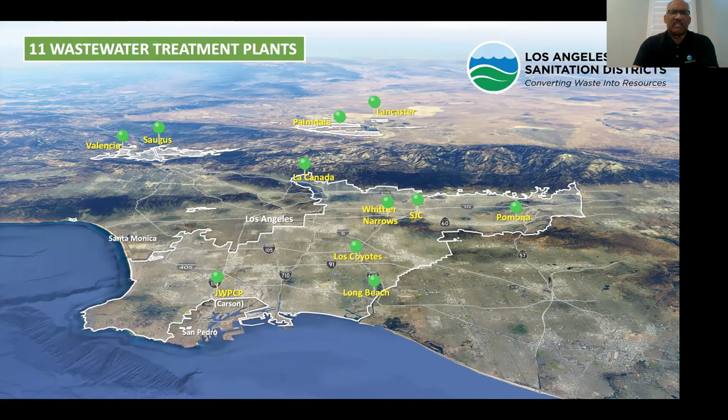Today, we're going to focus in on two of our sewage treatment plants in Santa Clarita Valley. On this map, you see the Valencia and Saugus treatment plants, and here's a close-up shot of that particular district. The dots here represent the Saugus and Valencia plants. The shaded area is the service area, the area that the sewage drains to these two treatment plants. The Saugus plant can treat about 6.5 million gallons per day, and the Valencia plant, that Mary's going to talk more about, could treat up to 21 million gallons per day.

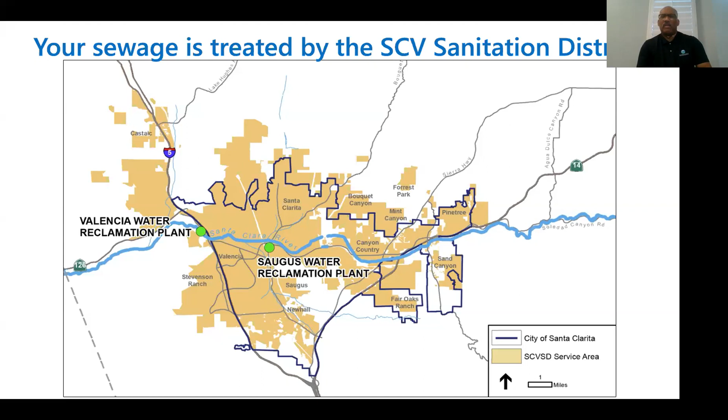Now, today we're going to focus on the Valencia plant. And with that, I think I'm going to turn it over to Mary. Mary, you're muted.

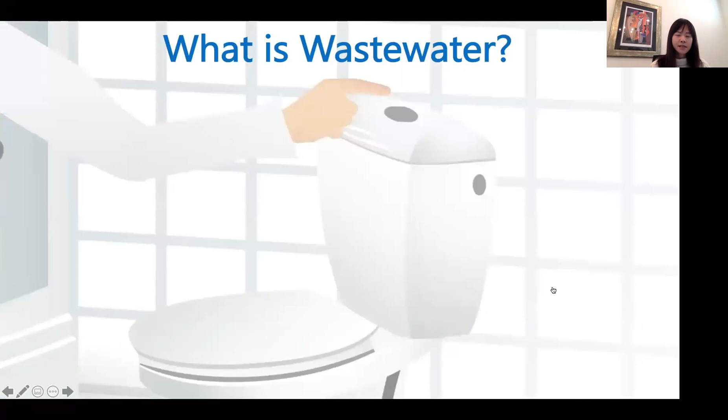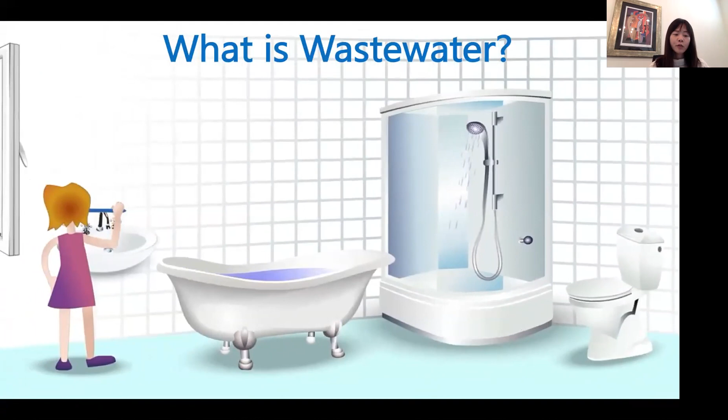Before we go into details of the treatment process, let's talk about what is wastewater. When you flush your toilet, take a shower, brush your teeth in the morning, or do laundry, they all require water. Each person creates about 85 gallons of wastewater a day, and the water you use goes down a drain to a pipe below your house, which we call a sewer.

The sewer system is quite amazing. It's a huge collection system underground that runs for miles. I'm sure most of you have seen manholes on the street, and underneath those manholes are actually sewer pipes. These sewers are built sloping down towards the treatment plant, so your wastewater arrives at the plant with the help of gravity. Gravity really is our friend for wastewater treatment because it's free - we don't have to use pumps or additional energy to move wastewater from your home to the treatment plant.

A wastewater treatment plant, I'm sure you already know, is a place where wastewater is treated to a very high level of quality and can be safely reused. As Basil mentioned earlier, reusing water is especially important in Southern California, where the weather is dry and we often experience water shortages.

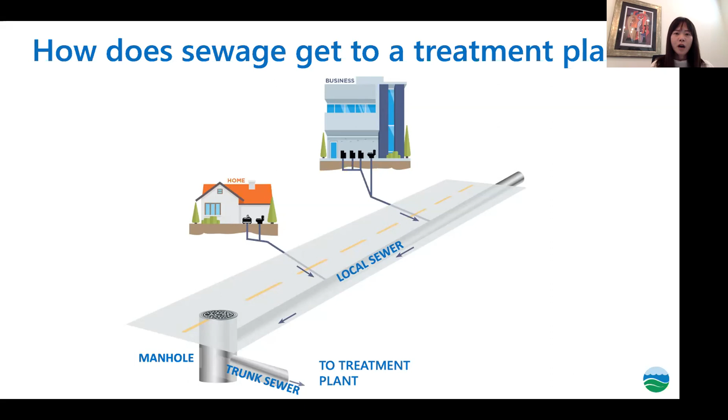The Valencia Water Reclamation Plant processes wastewater and all the solids generated in the sewer. This treatment plant was first constructed in 1967 with an initial capacity of 1.5 million gallons a day. Since then, we've had a couple of expansions, and now the treatment capacity is 21.6 million gallons. That's a little hard to grasp for some people, but imagine a gallon of milk that you see at the grocery store, and multiply that by 21.6 million gallons - that's how much the plant can process. So that's a lot of flow.

Most of the plant processes have been upgraded throughout the last 20 to 30 years to meet more stringent discharge requirements. Our upcoming projects include ultraviolet facilities and advanced water treatment facilities, which Basil will cover a little more in the later slides.

Typically, if we have tours on site, this is our starting point. But the difference with the virtual tour is that you don't get to have the delicious coffee and donuts that we usually provide for our attendees. So hopefully you have your own coffee while you're listening to this virtual tour.

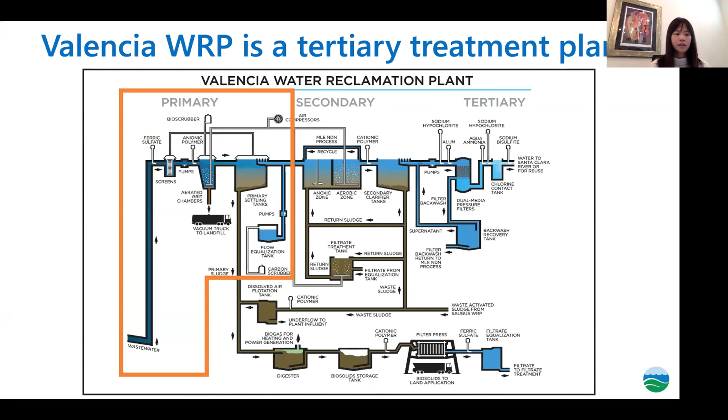The first major step is called primary treatment, where we remove large visible solids in the wastewater. The very first thing we do when wastewater enters our plant is use mechanical screening equipment to remove large objects like wipes, rags, and plastic bags.

One of the interesting things I've heard at one of our treatment plants is that operators sometimes see dollar bills or diamond rings in the bin. So if you ever accidentally lose your diamond ring, now you know where to look for it.

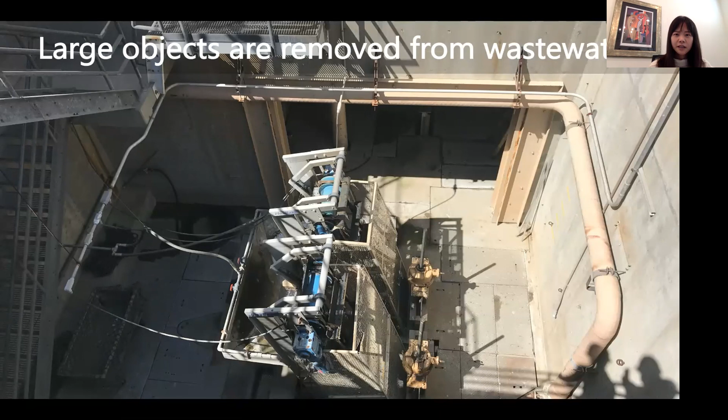Here's a close-up of our bar screen, and we call these flex rake bar screens. We have two bar screens working on our site.

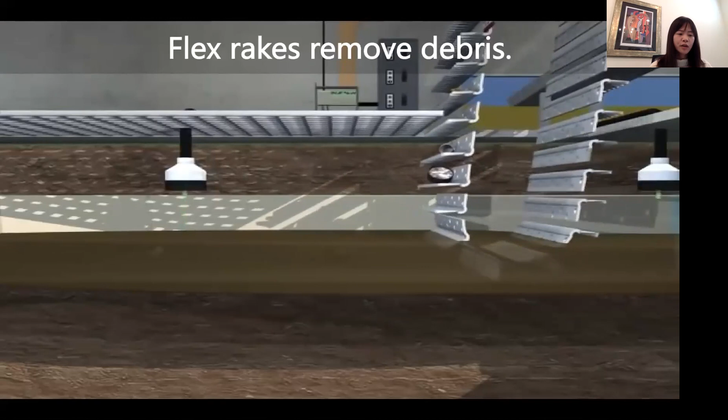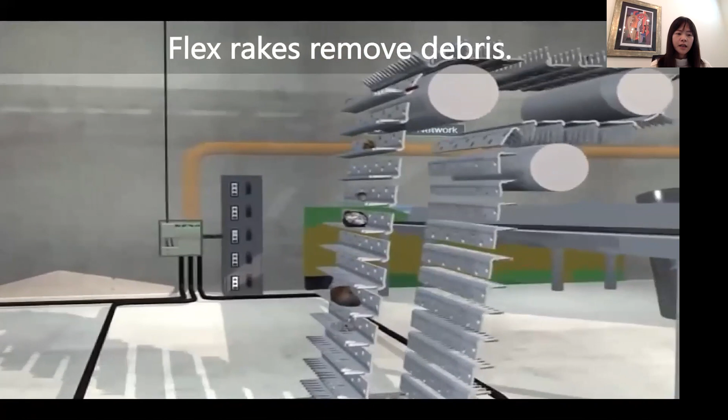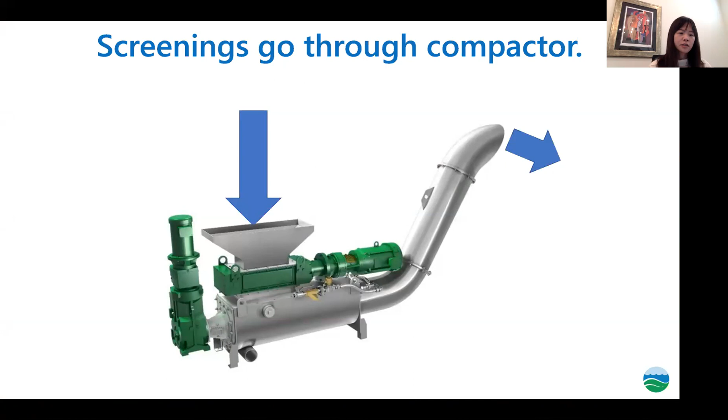Here's a good video that shows you how the screening equipment works. We have rakes that move vertically to catch debris and solids in the raw sewage, and we convey the solids upward. The solids then go into a grinder and a compactor before being dropped into a bin or trash bag nearby.

This video shows what comes out of the screening equipment. The debris that gets picked up by the bar screens is a little different from plant to plant, but what we've seen consistently throughout all of our WRPs is these flushable wipes.

The flushable wipes don't dissolve in water like toilet paper does, like the video that you just saw. So they do end up in our wastewater treatment plant, and it can actually do more serious damage to our pumping equipment, and those repairs can be quite costly for us.

As part of this tour, we really want to urge people to refrain from flushing those seemingly flushable wipes down the toilet. It may be convenient, but it actually creates a cost burden for your wastewater treatment plant.

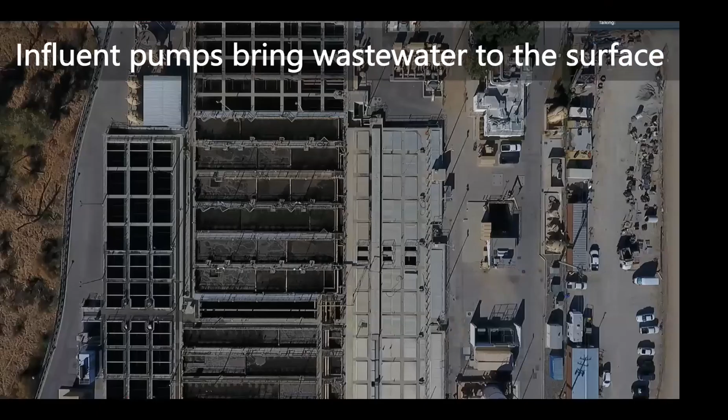After the screening equipment, wastewater enters our influent pump station, where wastewater is pumped from about 30 feet below grade to the surface. Here's a photo of 3 of our 6 influent pumps.

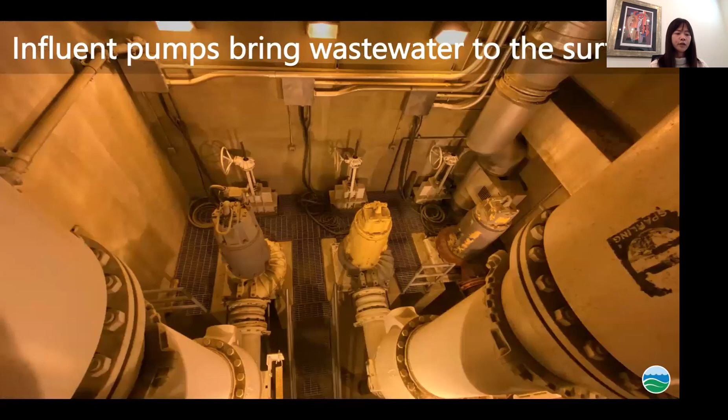One cool thing about these virtual tools is that we can actually show you photos of places that we typically don't take our tour groups to.

From the influent pump station, the wastewater is pumped into our grit chambers. Inside these grit chambers, we are removing grit, eggshells, sand, and smaller particles to protect our downstream pumping equipment, and we can prevent grit settling in our pipelines and channels. We have 4 grit chambers, and each of them is about 6 feet deep.

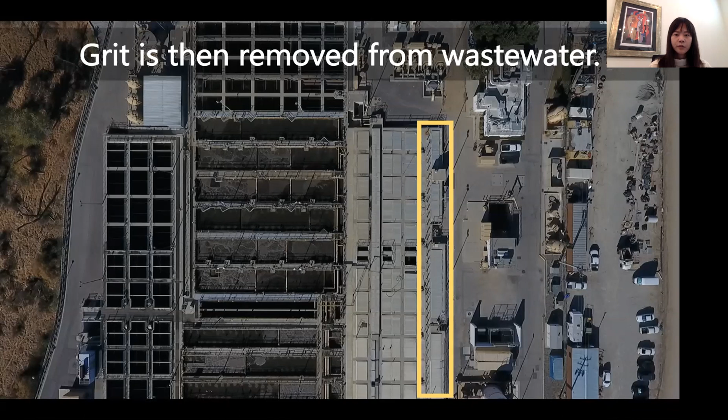From the grit chambers, wastewater flows by gravity into our primary sedimentation tanks. Here's a photo of our primary tanks. The main point of this process is to remove oil and grease that floats on top of the tank and remove more solids at the bottom. We do add chemicals such as polymer and ferric sulfate to enhance our settling.

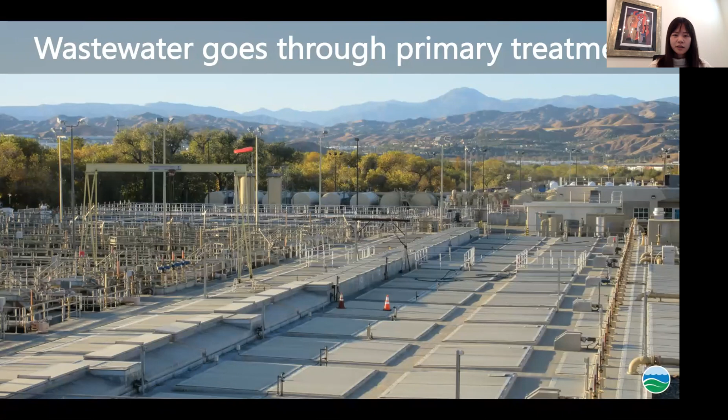As you can see, these tanks are typically covered because we want to be good neighbors, and we're actually really close to Magic Mountain, so we wouldn't want those riders to smell anything foul when they're screaming their lungs out up there. Let's take a closer look at the floatable materials when we open up one of the lids. You can see a little bit of grease and still a little bit of sand up there.

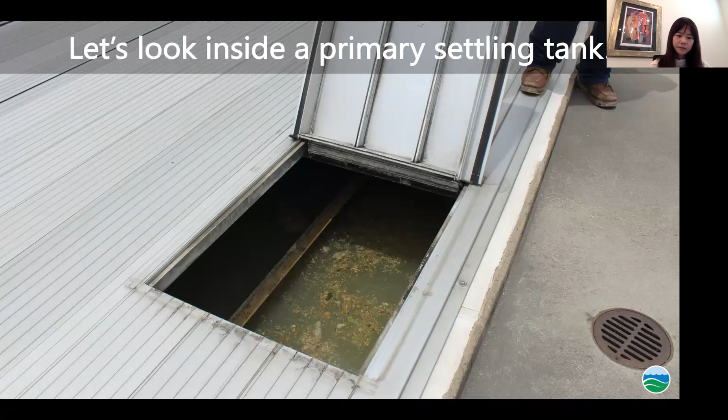This is the inside of a typical primary sedimentation tank. Wastewater spends about 2 hours in our primary tank, and we have a total of 14 primary tanks, about 65 feet long, about 11 feet deep.

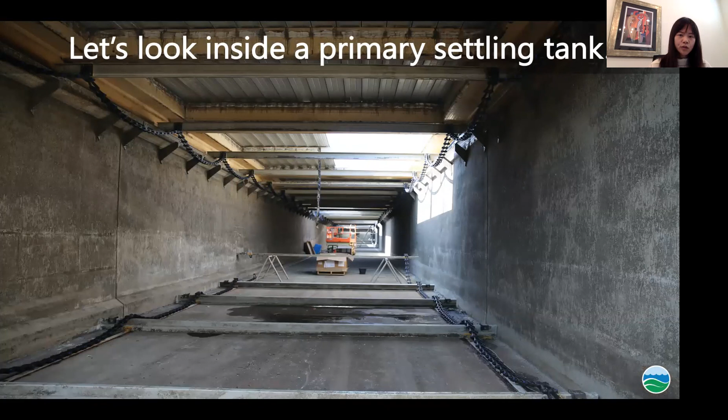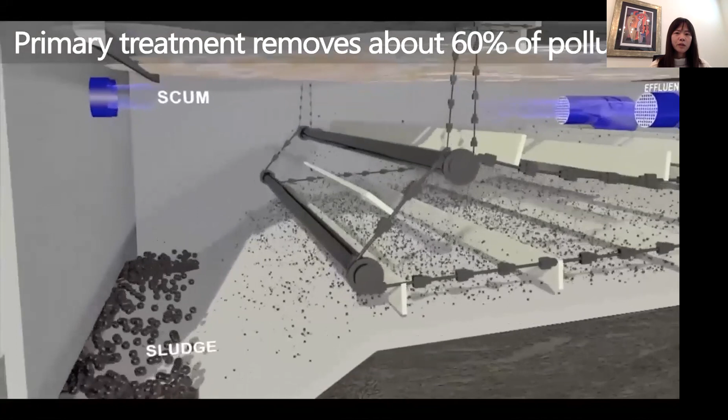This clip shows you how the flight and chain works to skim off materials on top and push materials that settle down at the bottom. Just from this treatment, we're removing about 60% of the impurities in water.

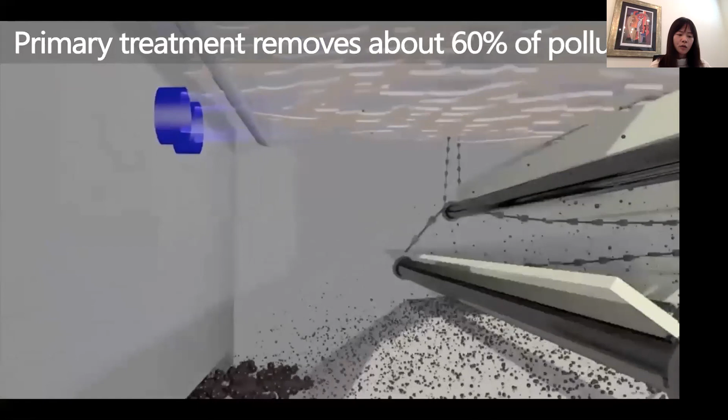The wastes that are collected into the hopper we call primary sludge, and they're pumped to our digester for treatment. I will talk a little more about digesters in later slides.

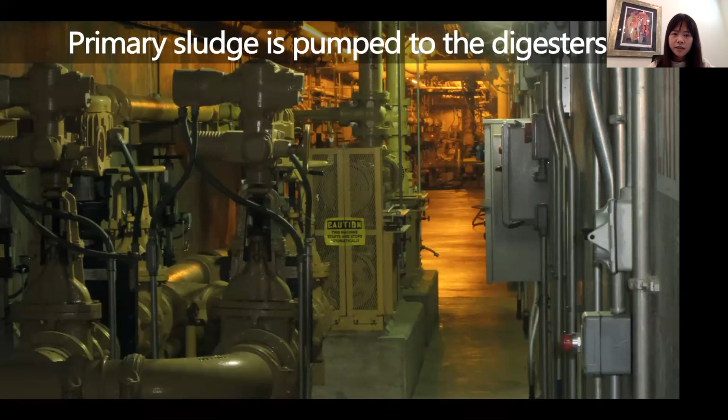After the primary treatment process, the flow actually gets diverted to our equalization basin, and I'll refer to that as an EQ basin, just in short.

Flow is diverted when we have high flows, which is typically in the morning when everyone is waking up to brush their teeth and getting ready for work. The flow from the EQ basin gets returned to the plant later during the day and night when we have lower flow coming into the plant.

These basins are actually pretty important for us because they balance out the loading to our treatment plant, so we don't have to make drastic adjustments to our mechanical or chemical equipment.

Now that we're done with primary treatment, which mainly uses physical mechanisms to take large solids out of our wastewater, we're going to move on to secondary treatment and talk more about the biological process to treat our wastewater.

This is what our aeration tanks look like. There's a short video.

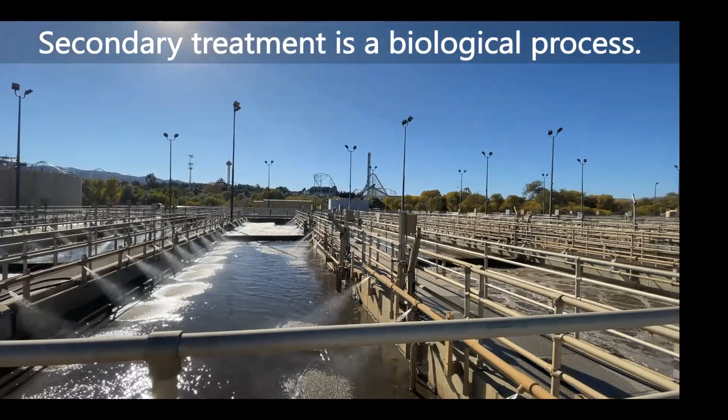And there's Six Flags, Magic Mountain, in the background. Yeah, we do hear screaming sometimes when it was operating.

I see a Q&A. Should I stop, Genesis?

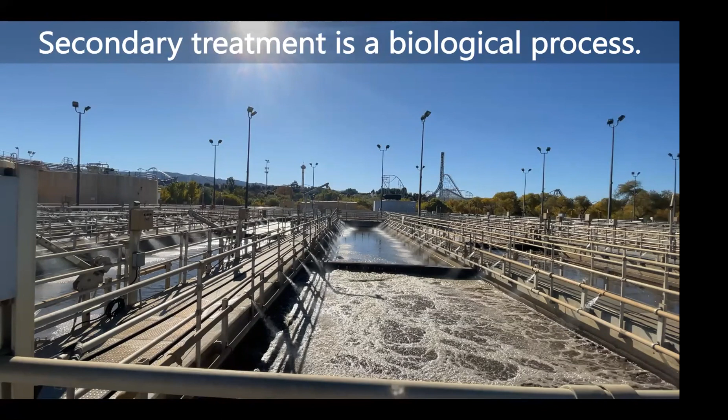So the question you just got is from Ken. He asked how much solid waste is generated every day in terms of tons, garbage truck fulls, etc. We get about 100 tons a day, at 25 tons per truck, so that's about 4-5 trucks a day, or 20 trucks per week.

Anything else? Yeah, that's it.

So at this stage, we're using microorganisms to do all the work for us. For the microorganisms to survive, they need food and oxygen, so they use the organic matter in wastewater as the food source. With the right amount of oxygen, the microorganisms are able to convert ammonia into nitrogen gas. Our atmosphere is composed of 78% nitrogen, so if we release more nitrogen, it's actually not harmful to our environment at all.

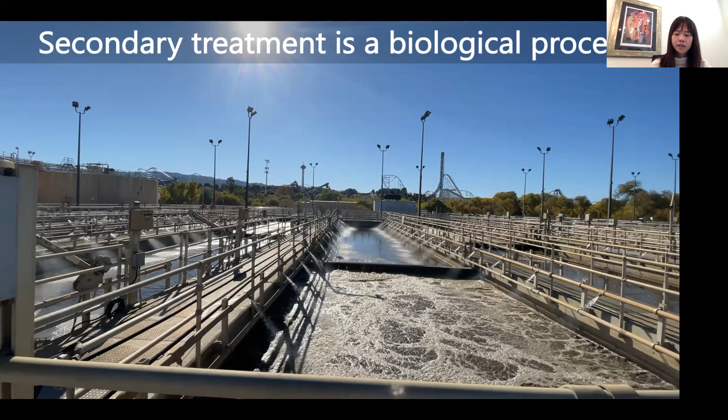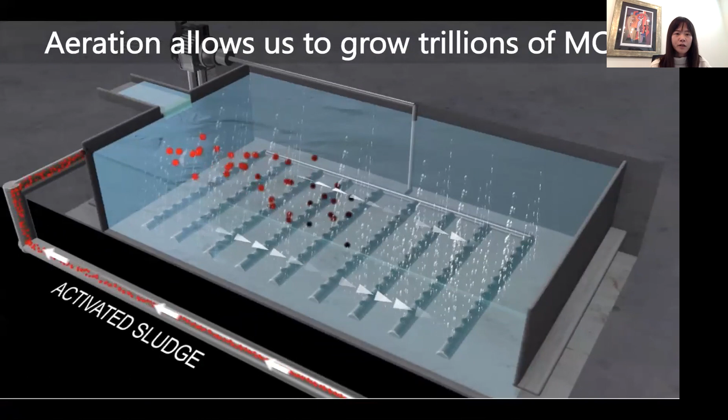This plant has a total of 12 aeration tanks, with trillions of microorganisms, or MOs, in each aeration tank. These microorganisms spend about 5 hours eating the organic matter in the wastewater.

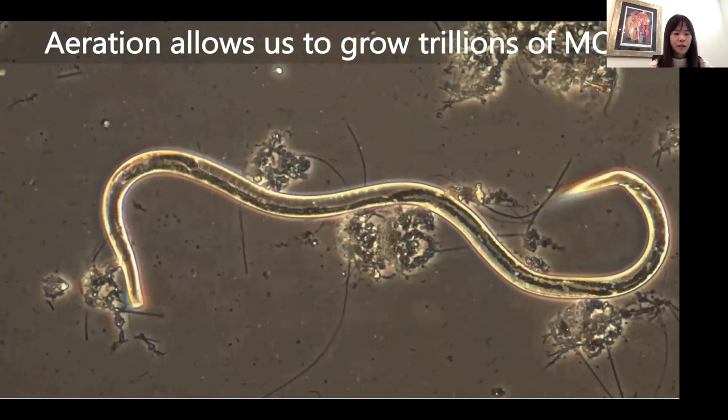Each treatment plant has its own lab that takes a sample of our mixed liquor on a daily basis just to make sure our microorganisms are in a healthy state. Mixed liquor is a term we use to describe the mixture of microorganisms and the primary effluent in our aeration tank.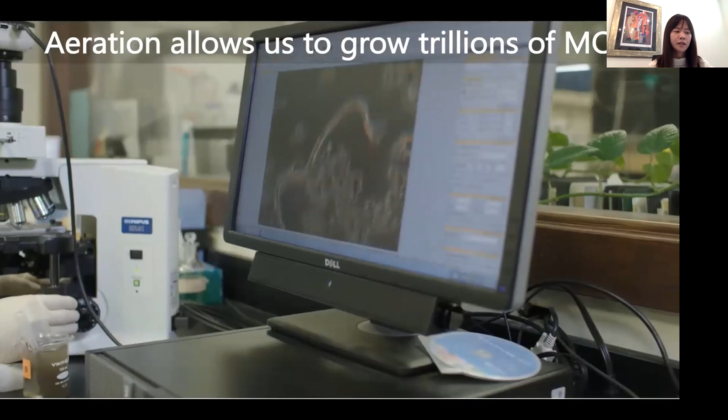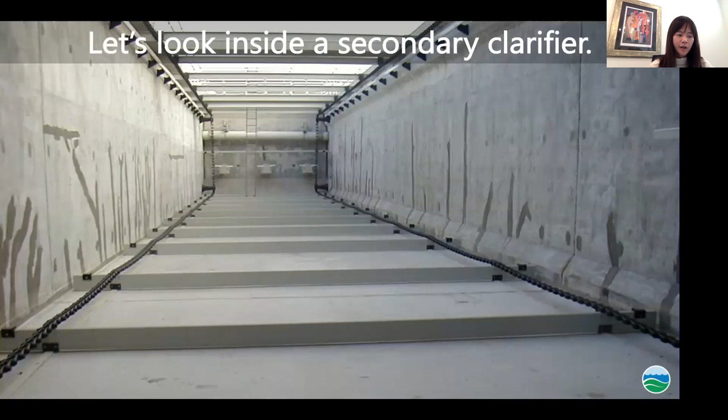From the aeration tank, mixed liquor enters another settling tank, and again we're allowing gravity to do the work for us to settle out solids in the mixed liquor. Solids that settle at the bottom of the clarifiers are now called sludge. Some sludge is returned to the aeration tanks to achieve the appropriate food-to-microorganism ratio, and some of it is wasted. This is a photo showing the inside of our secondary clarifier.

And you're right, it looks a lot like our primary, and it uses the same mechanism. We have a chain and flight that pushes heavy stuff at the bottom to the hopper, and we skim off anything floating on top.

The treated water then flows out of these teeth-looking weirs. Wastewater spends about 3 hours in our secondary clarifiers, and by now you should be able to see a quite drastic change in the quality of the water. We're only halfway through, about 10 hours into our treatment process.

Previously, I mentioned that we have to waste sludge from our secondary clarifiers, but you may wonder where that sludge is going. So let's take a detour from here to talk a little bit about solid handling.

Before the waste sludge from the clarifier goes into our digester, it's thickened using tanks called dissolved air flotation tanks. Basically, the technology here is that we use small air bubbles to separate solids from water and force all the solids to the top, then we skim the top layer off and pump those to our digesters for further treatment.

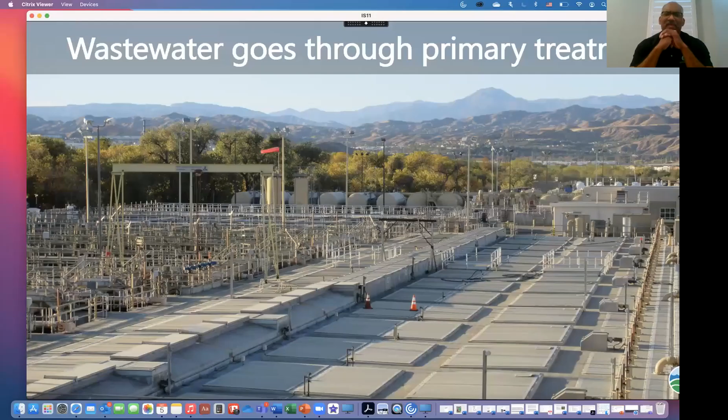All right, goes through primary. So we've gone through, wastewater goes through primary treatment. Next slide.

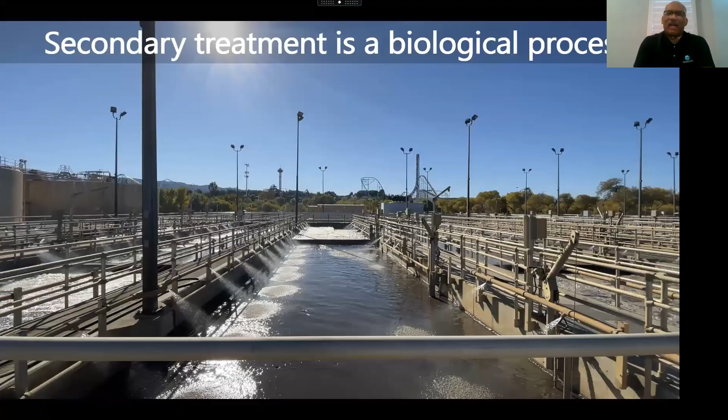I know, Mary, you didn't want to do this. You didn't have to get bad Wi-Fi on us. All right, go ahead, we're back at the digester. Oh okay, so let's see.

So we're at, I think I dropped out around when we're using methane gas to fuel our boiler, which applies steam to our digester to keep it at a constant temperature of 98 degrees. That's a very cost-effective operation because the digester is constantly reusing energy that it produces to continue the treatment process. Each digester is about 750,000 gallons, and the sludge spends about an average of 30 days inside these digesters before they're sent to our dewatering process.

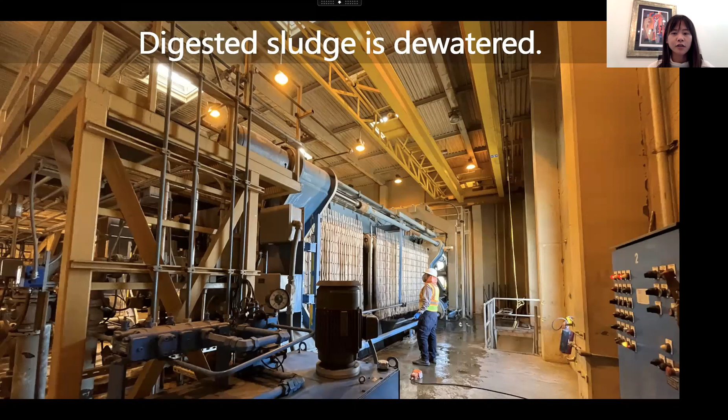This is a photo showing the inside of our dewatering building. This is one of the 2 filter press units we use to squeeze water out of the digested sludge. We dewater the sludge from 3% to 20% at this point.

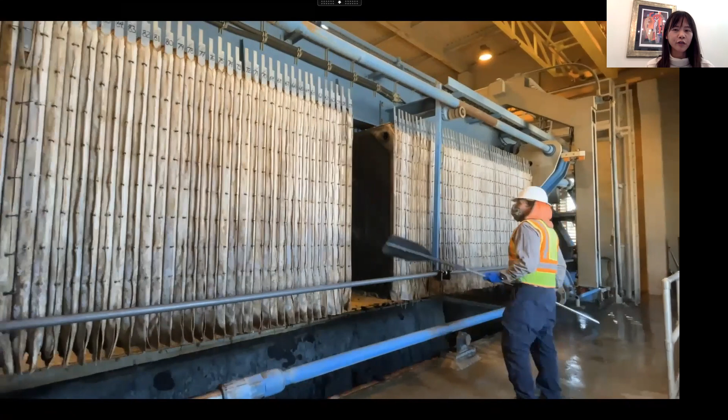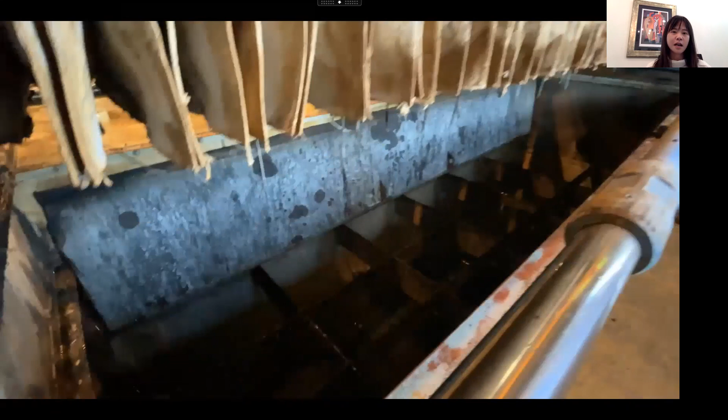This is a cool video showing our filter press operation, which is a series of plates that sandwich the sludge in the middle, and that's how we squeeze the water out. The dewatered sludge is now referred to as cake or biosolids. As the plates open, typically the cake will just fall down to the hopper by gravity, but sometimes the cake sticks to those cloths, so that's where you see our operator using scrapers to make sure all the cake is removed from the cloth.

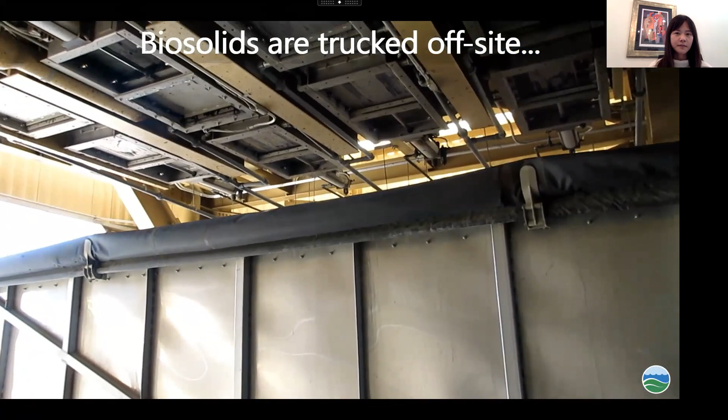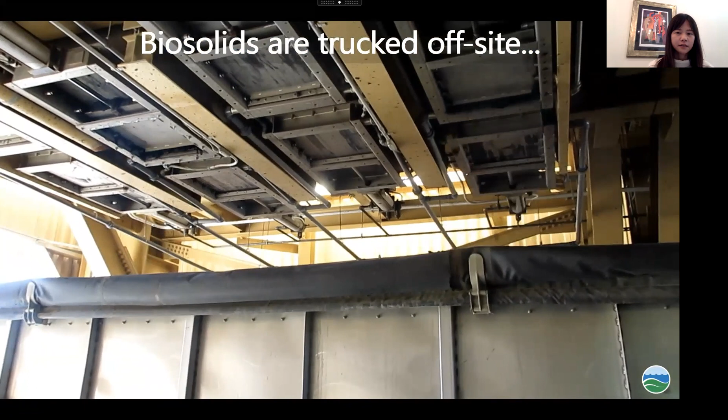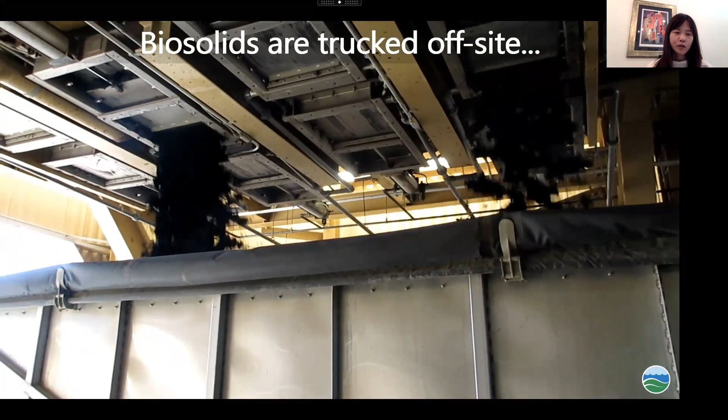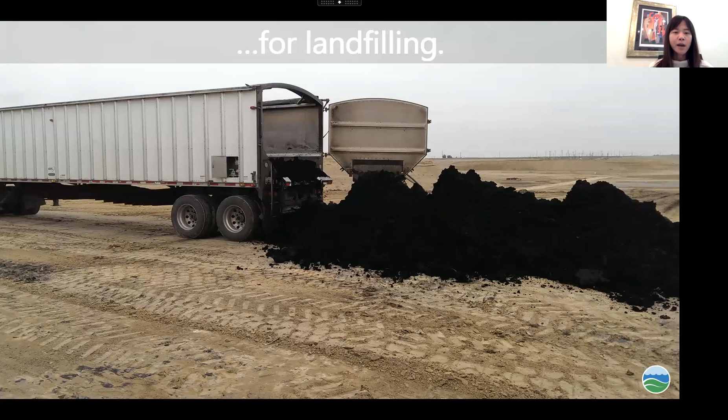About 20 trucks come through our plant per week to pick up the biosolids, and these biosolids are used for landfilling purposes.

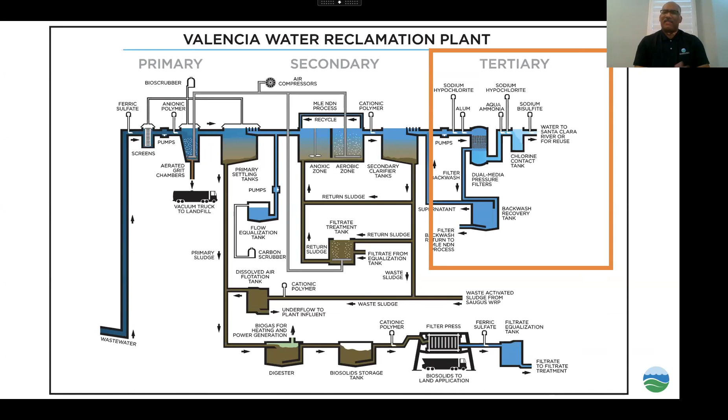But we have it covered and it has a slight vacuum. Secondary treatment, I don't notice it, or I don't even know how to describe it. You're probably able to describe that better. For me, it doesn't—yeah, I can't. If I come up with a good analogy, I would. But for me, it doesn't smell bad at all.

Okay, so Genesis, can we go back? So I'm going to continue on. Now we've covered the secondary treatment and solids handling. We're going to continue on with our wastewater treatment process, and the last stage of the process is called tertiary treatment.

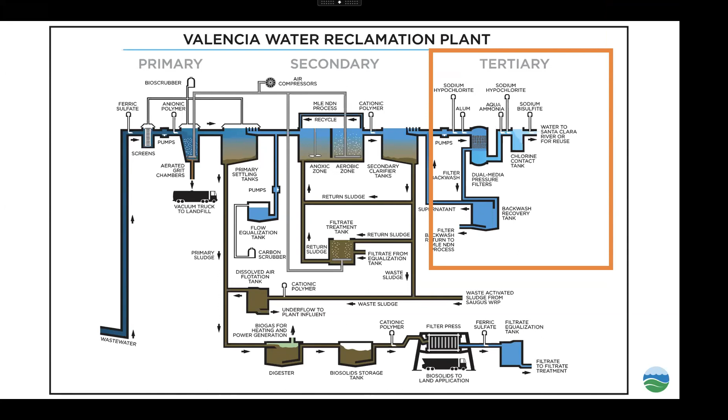The treated water out of our secondary clarifiers now enters the dual media pressure filter. Think of this like the Brita or PUR water filter you have at your house. The water trickles through the media from the top and is purified that way. But for our pressure media filters, the water enters through the top and goes through anthracite, sand, and gravel. With this process, the remaining suspended solids in wastewater get attached to those media and get cleaned that way.

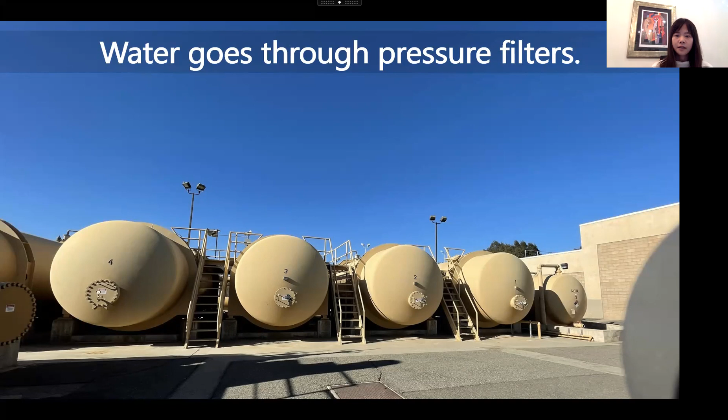At Valencia, we have 14 pressure filters. We call these pressure filters because they're enclosed and water is pumped into each filter and creates pressure inside. Pressure filters take less space than our typical gravity filter, but they also require more cleaning and backwashing.

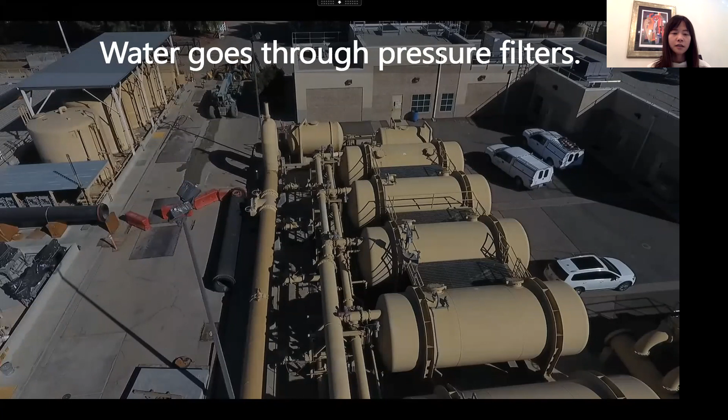The very last step of the treatment process is to disinfect our wastewater. This is where we kill off bacteria, pathogens, and viruses in wastewater by using ammonia and sodium hypochlorite. If you guys remember the 3 main treatment mechanisms—physical, biological, and chemical—this stage is definitely very chemical heavy. The sodium hypochlorite tanks are in the center of the photo.

Water spends about 2 hours in these chlorine contact tanks, and the chlorine residual at the end of these contact tanks is extremely crucial. So we have analyzers throughout our tertiary treatment to make sure that the water is chlorinated properly.

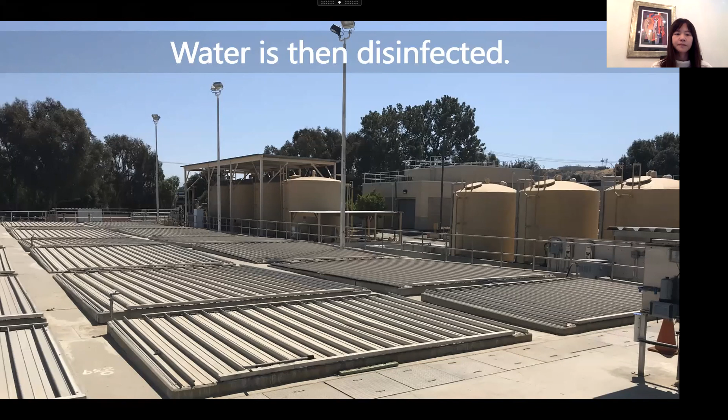So after the chlorine contact tanks, we still have chlorine in our effluent. Having chlorine in water is not safe for our natural habitat, so before we discharge treated water to the river, we actually add sodium bisulfite to dechlorinate our treated water. These 3 tanks here are the sodium bisulfite tanks.

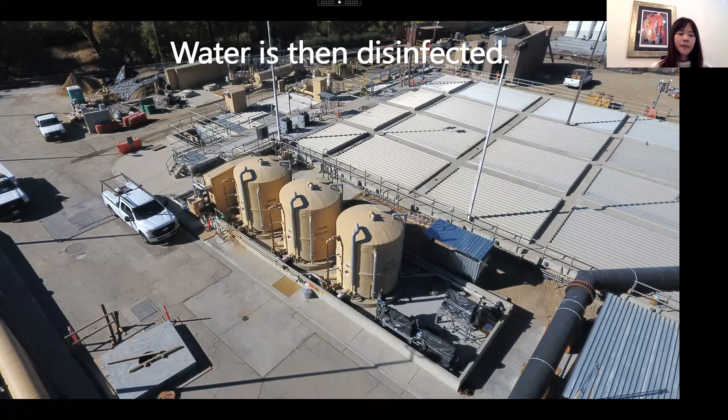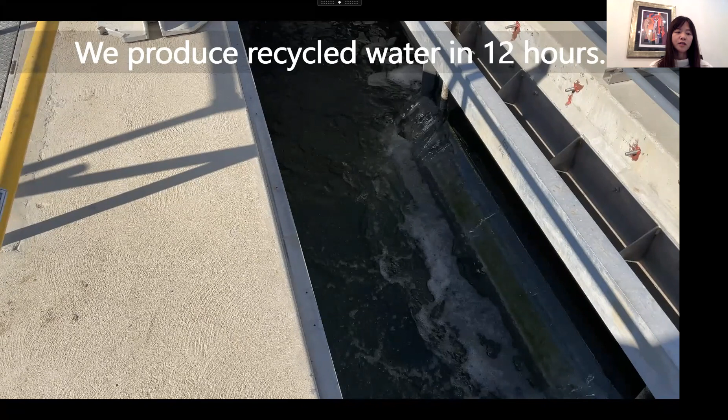So from the moment your wastewater reaches our plant, it only takes 12 hours to convert it to water that can be reused and discharged to a river. Now let's take a virtual tour down to the river discharge. We have a pretty nice trail at the west end of our treatment plant that takes us to the river discharge location.

This water definitely looks very different from the sewage that first came into our plant. This water is safe for recreational use and safe for fish and other natural habitat that lives around the area. About 13 to 15 million gallons of water comes into our plant, and most of the flow comes here for discharge and for reuse. A little bit less than 1 million gallons a day is reused for golf courses and green belt irrigation.

We're constantly upgrading and improving our treatment plant process in order to meet more stringent water quality requirements. Now, Basil is going to talk about our current construction at Valencia and why those projects are extremely important for us. All right, thank you, Mary.

The water that goes into the river is great quality tertiary effluent produced after 12 hours. But the regional board, the agency that regulates our discharges, has said our chloride concentration is too high for the uses of that water along the river. Right now our chloride concentration in our effluent is about 120 milligrams per liter.

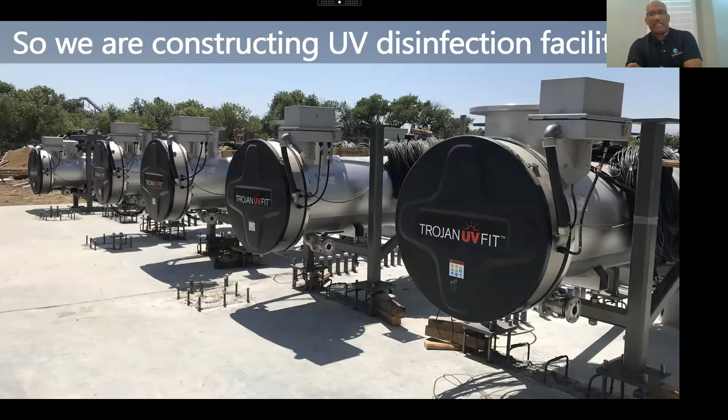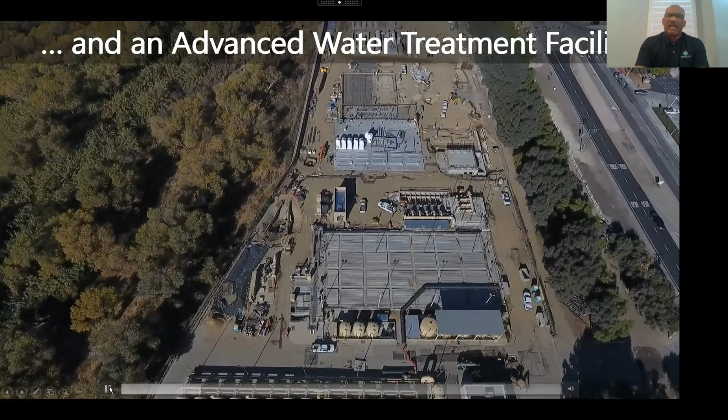But the big deal is this advanced water treatment facility. You're looking at an aerial of it. As you go to the north, pause it one second Genesis. Could you point out the UV disinfection facility, since I don't have cursor control. You'll see it where Genesis' mouse is at. As you go further north, you'll see the advanced water treatment facility. There's a number of facilities: microfiltration that'll occur there, nanofiltration, and then what we call reverse osmosis.

This facility is not going to take all the flow from the Valencia plant. It'll take a fraction, as much as 8 million gallons a day, and create ultra pure water with a very, very low chloride concentration. We'll blend that with the remaining water produced by the plant and discharge it to the river to meet the 100 milligrams per liter target. That project should be done in 2022.

As you can see, there's a lot of work going on there, and given these COVID times there's been some adjustments, some delays, but the contractors are proceeding ahead with proper safety precautions. Both of these upgrades to our facility should be online, the UV next year, advanced treatment in 2022. And that's it, it's the story of the Valencia treatment plant and how, as Mary said, it's always grown, always protected public health and the environment, and we're always adjusting to meet the needs of our community.